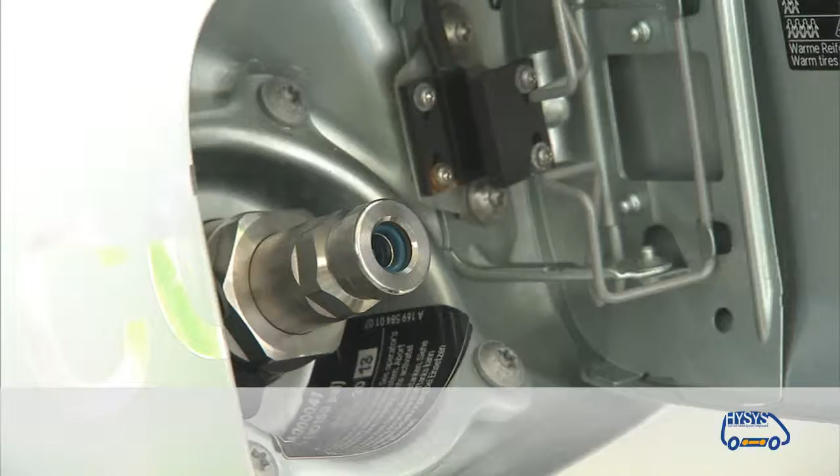Electric vehicles with fuel cell powertrain have very high potential to fulfill the needs for a sustainable mobility of the future. They have a very high efficiency and can be fueled with pure hydrogen. Moreover, they don't produce any emission while driving. The range of fuel cell vehicles is rather high in comparison to other electrified vehicles, and furthermore, the fueling time is short.

Additionally, hydrogen technology and fuel cell drivetrains contribute to the climate and energy policy of the European Commission. The discussion of transportation in the future is marked by 5 key factors. First, the reduction of greenhouse gas emissions. Second, the energy security. Thirdly, the increasing energy efficiency. Fourth point is improvement of the life of the inhabitants, and not to forget the last point, which is competitiveness of the European industry.

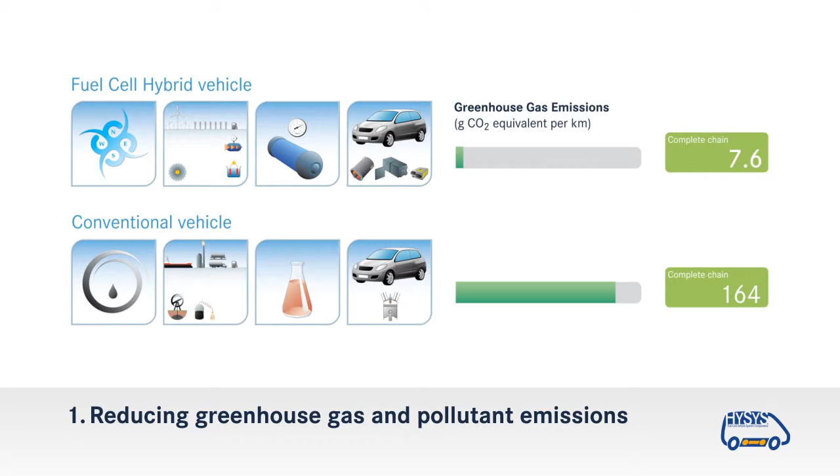As hydrogen can be produced from a variety of energy sources, it contributes to a significant reduction of CO2 emissions because it can be produced by renewable energies. Additionally, the large primary energy sources for hydrogen production contribute to the energy security because hydrogen can be produced everywhere in the world and is no longer dependent on regional focused supplies like crude oil.

The high efficiency of the fuel cell powertrain contributes to a significant reduction of the energy consumption for the transportation sector. Not to forget the low noise emissions, which contribute to an improvement of the life of the inhabitants. And lastly, the European industry and academia is already in a very good position in the range of fuel cell technology and hydrogen technology. Therefore, fuel cell technology and hydrogen can contribute to a higher competitiveness of the European industry.

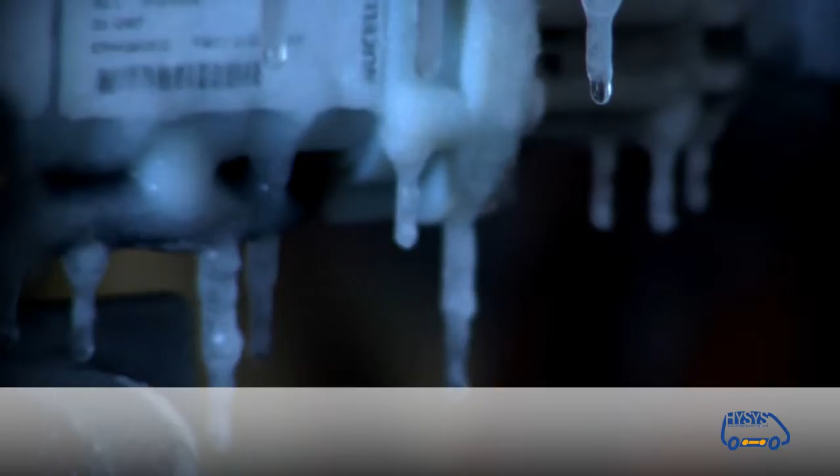HySYS is a research and development project which is funded by the European Commission. Partners of the HySYS project are coming from the automotive industry, the supplier industry and academia. The goal is to improve system components and subsystems for fuel cell and hybrid vehicles. These components can also be used for other electrified vehicles like battery vehicles and plug-in hybrid vehicles. Once the components are developed, these will be integrated into validator vehicles in order to test the entire system.

HySYS is a joint project of 28 partners out of 9 European countries. The project started in December 2005 and will end in November 2010. It is coordinated by Daimler and has a budget of €22.7 million. From this, €11.2 million are funded by the European Commission.

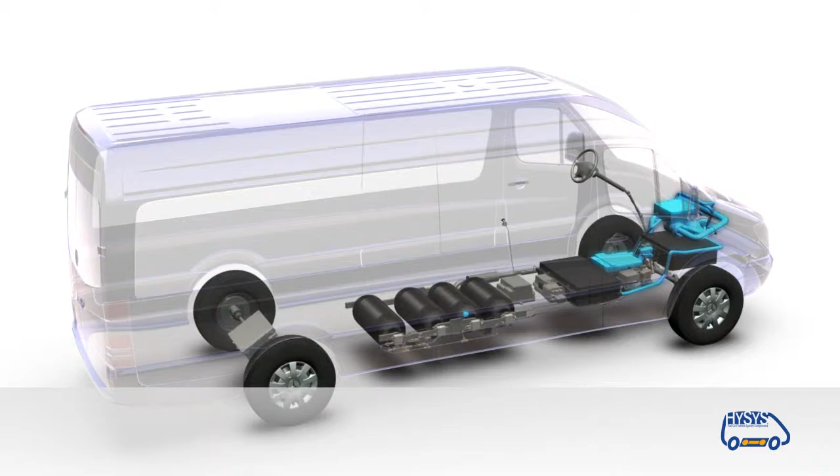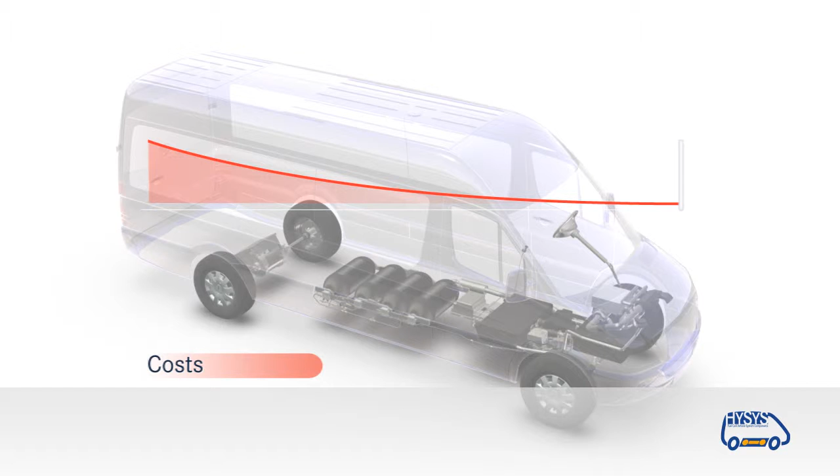The main objective of the HySYS project is to develop system components for fuel cell drivetrains and hybrid electric drivetrains. On one side, we are working on fuel cell system components, on the other hand, on electric drive components. We are focusing on the most important fuel cell and electric drivetrain components, which have the highest potential for cost reduction and mass production. The approach is to reduce complexity and use innovative approaches.

This is done by improvement of fuel cell technology and electric drive technology in respect of functionality, reliability and cost. The optimization of system architecture and energy management contributes to a reduction of energy consumption and increase of power density.

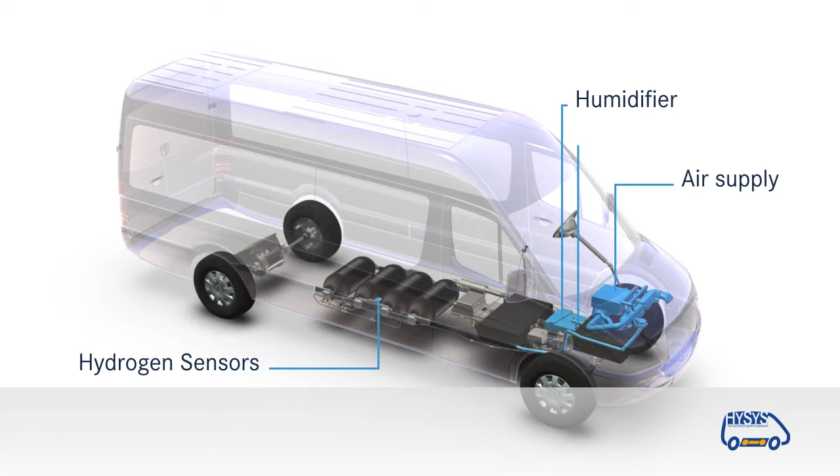On the fuel cell side, we are focusing on 4 components: the air supply, a novel humidification system, a new hydrogen sensor concept and an innovative hydrogen supply line including hydrogen pump and metering. On the electric drive system side, we are working on all important electrical components: the electric motor, the power electronics and the battery.

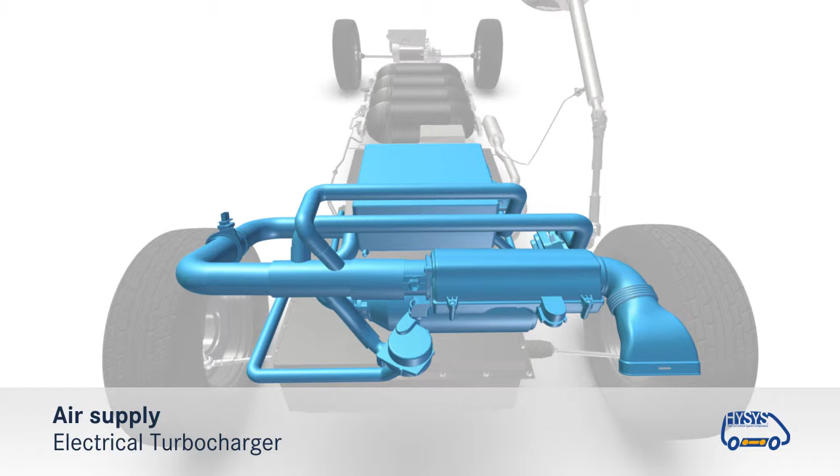When we look at the air supply system, the key component is an electrical turbocharger with a very high efficiency. However, the costs for this advanced air supply system are relatively low. So is its volume and weight. In addition, the turbocharger has a high dynamic response and produces very low noise during operation.

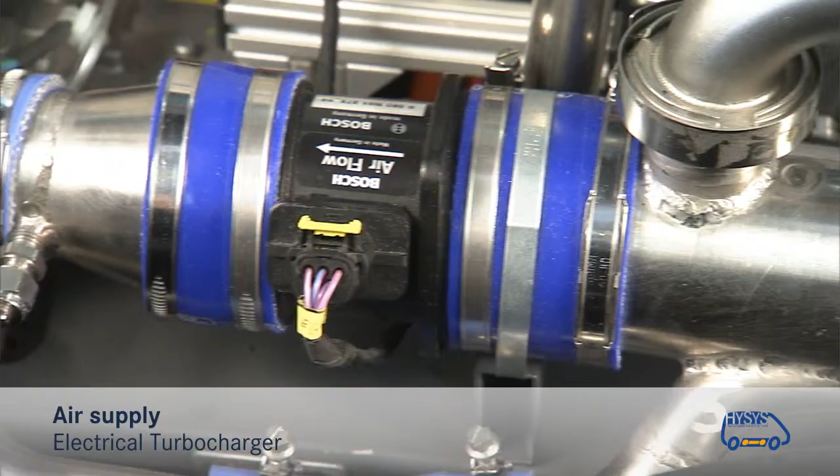The humidification system is based on a gas-to-gas humidifier with a high packaging density. At the same time, we have high humidification efficiency and low degradation tendency, although we are using low-cost materials and an easy production technology.

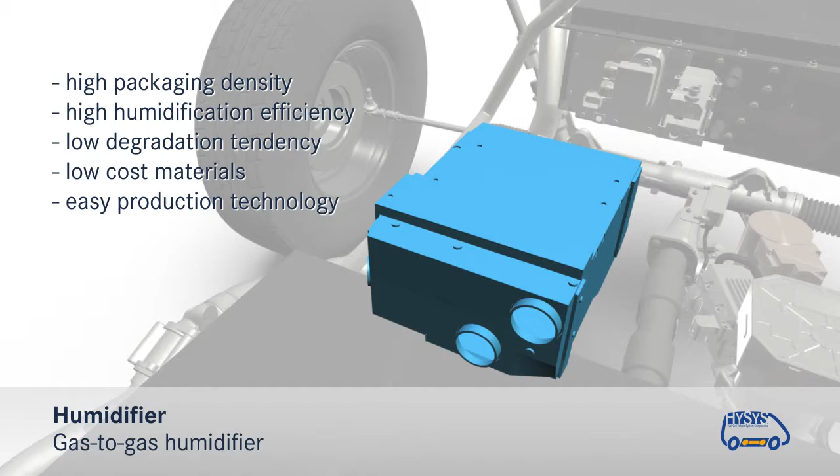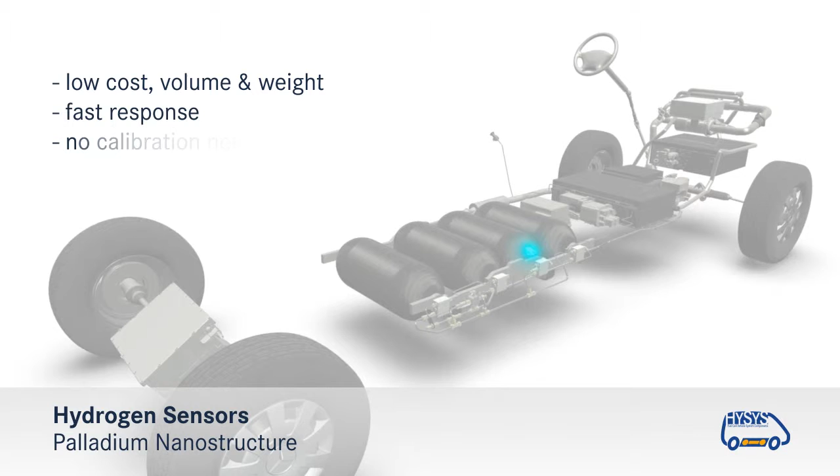The new hydrogen sensor concept uses palladium nanostructures. The results are low costs, volume and weight. The sensors have a very fast response and no calibration is needed anymore. The concept assures a high gas selectivity and an integrated design.

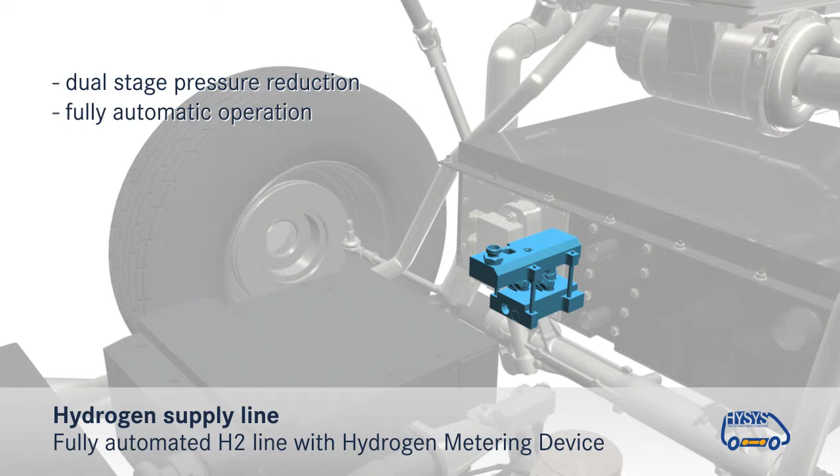In the vehicle, we have integrated a fully automated hydrogen line, including an innovative hydrogen metering. It allows for a dual-stage pressure reduction and a fully automatic operation. Furthermore, the fuel cell stack pressure can be regulated more easily. A failure recovery supports the system's safety. And last but not least, the overall lifetime of the fuel cell system has been improved.

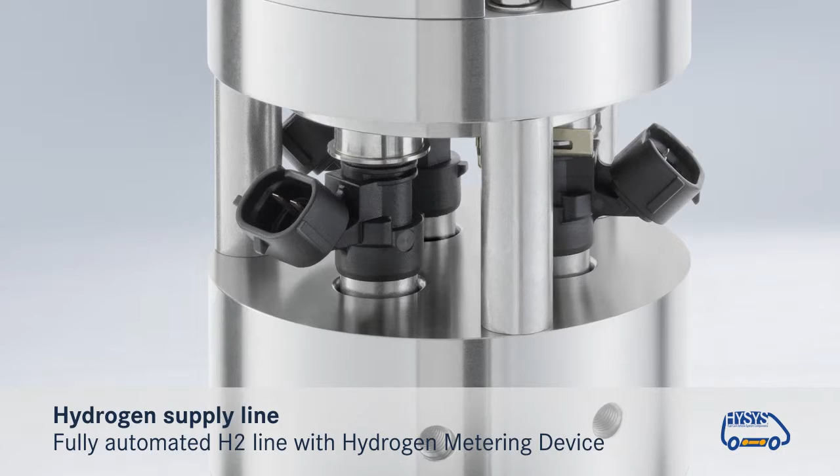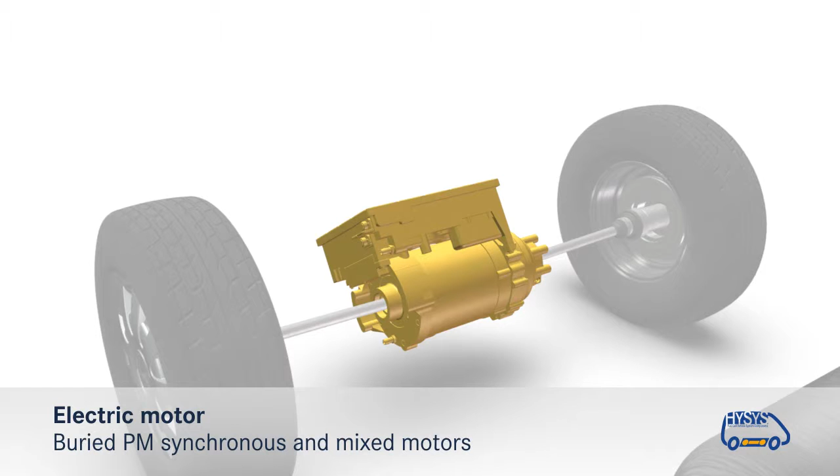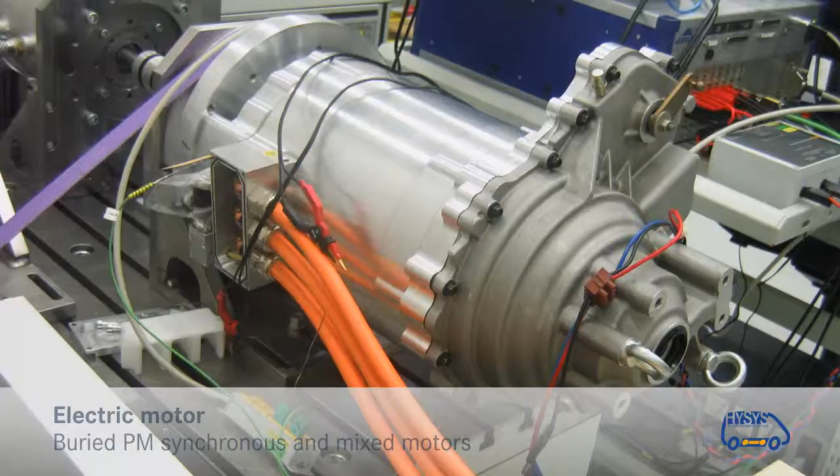When we look at the electrical motor, we decided to go for buried PM synchronous and mixed motors that have higher specific torque, power and efficiency. Regarding power electronics, we focused on a modular solution with high power density. This could be achieved by better integration of these components and a higher cooling temperature of up to 90 degrees Celsius.

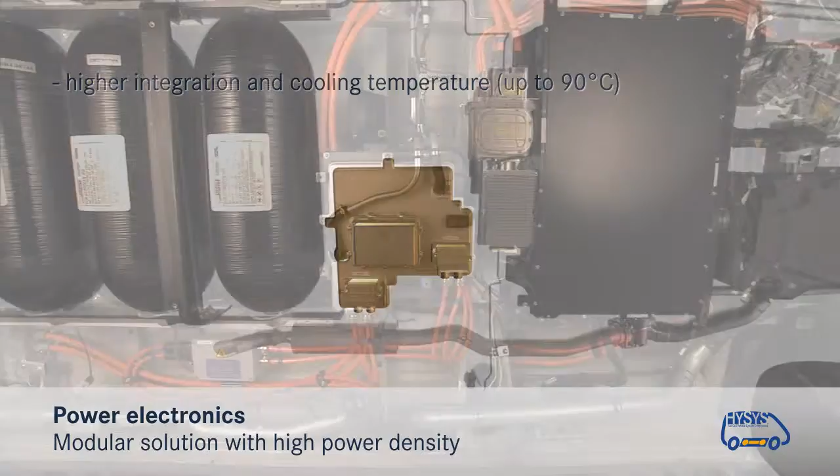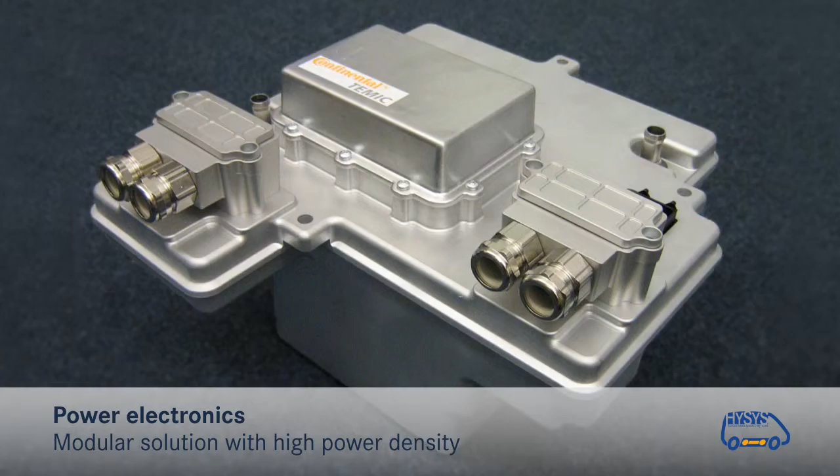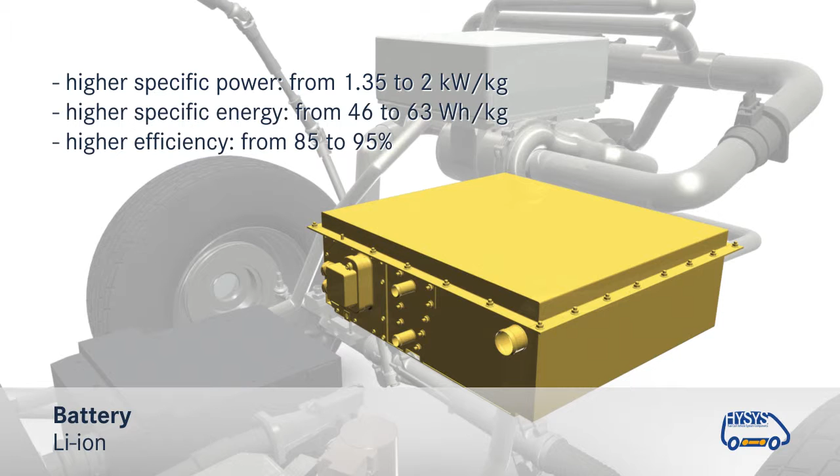The innovative lithium-ion battery is a key component for the electric drive system. The battery has a specific power of 2 kilowatt per kilogram and a specific energy of 63 watt-hour per kilogram. The efficiency reaches up to 95% with a lifetime of about 15 years.

In addition to the development of the components themselves, we are working on a standardization of these components too. At the same time, we are looking for synergies between fuel cell and hybrid vehicles. Safety is another very important aspect, both for hydrogen and electric safety. Not to forget the optimization of control strategies and energy management, which lead to a significant reduction of energy consumption.

HySYS can pave the way towards commercialization of fuel cell and electric drive systems. The availability of low-cost components is important to be able to produce such vehicles for the mass market. Close cooperation between the supplier and automotive industry is the key for this issue. HySYS is an example of how this cooperation can be done.